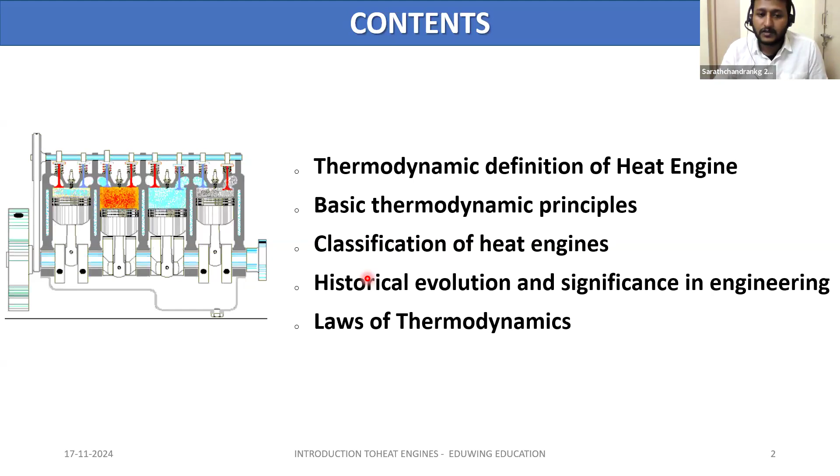the milestones of the evolution of these engines, and we have a few laws of thermodynamics that also we are not going too much deep into, but a basic idea is required for understanding the working of a heat engine. So let's move into that. So what is a heat engine actually? As the basic principle, thermodynamically, a heat engine is any device that can convert thermal energy into mechanical energy. Hope we know what is thermal energy and also what is mechanical energy.

Thermal energy, we can say it as heat, and mechanical energy, we can refer to as work, mechanical work. I have highlighted heat and work in red, because we need to understand them properly before moving to the contents. We will be having a concept of heat as well as work, and a little more additionally we have to know. So as per this definition, any device that can convert thermal energy to mechanical energy is considered to be a heat engine.

Then the crackers, right, which move up and crack above in the sky. Rockets, cracker rockets. That also, by this definition, is a heat engine, right? Rocket engines, maybe guns. That all comes under heat engine by this definition. So whatever we know is far different from these bodies that are converting thermal energy, right? So there is a difference. For understanding those, we have to go through these basics.

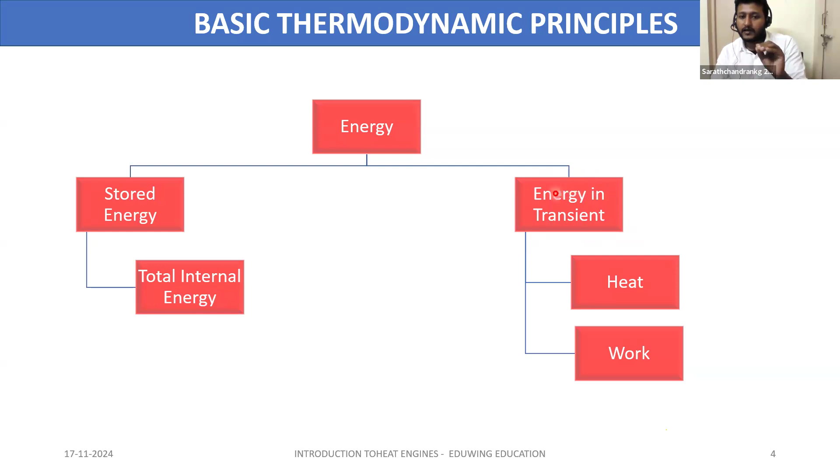But for us, who are going to study heat engines, work actually means mechanical energy only. So for our convenience, we will be terming energy in transient as heat and mechanical work. Okay, so that's what I was referring to here: heat and mechanical energy, thermal energy and mechanical energy, heat and work. But there are other kinds of work also, as I told you, like electrical energy.

For example, when you connect a bulb or a resistor into an electrical circuit, it raises the temperature, right? That is because of the electrical work done on that system, not because of the temperature difference. There was initially no temperature difference, right? When the current passes through that resistor or light, it heats up just because of the electrical work being done there. So that is not important in the case of a heat engine. So we will be considering heat and mechanical work only. Okay.

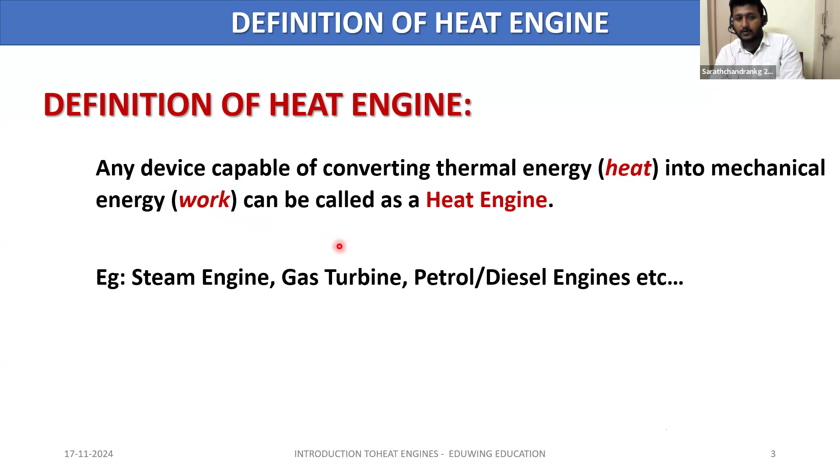So the types of heat engines. As I told you, by definition, anything that converts heat into mechanical work can be defined as a heat engine, right? But conventional engines like a petrol engine, a diesel engine, a gas turbine or a steam turbine are different from these. It's different from a gun. It's also different from a rocket cracker, right? It's very different. How is it different?

Because once this cracker or a gun is shot, a process happens, that is a burning happens. That means the gunpowder burns, heat is created, I mean a heat transfer is created, and it is converted to mechanical energy, and the process stops there. It won't generate again. I mean the heat energy is not transferred again in that system, or converted to mechanical energy in the system, right? It's a one time process. Once the gun is fired, that is done.

But in case of the heat engines, what we are going to discuss, the operation will be cyclic. We know we have petrol engines, diesel engines, and how they work. We pour the fuel into that, it will be burning continuously and giving out the work output continuously, right? Until we switch it off, it will work continuously. Or we can say it is operating in a cycle, or the system restores. Even though I haven't taught you this example, you can see this is a cyclic process.

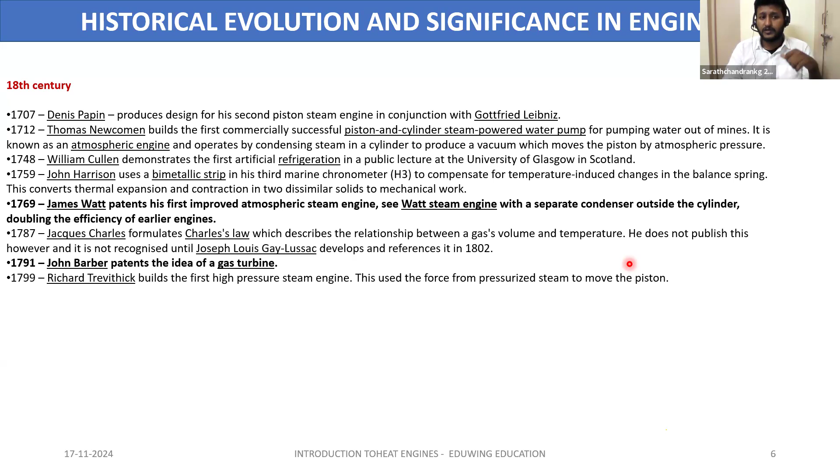In 1791, John Barber came up with the idea of the gas turbine. Gas turbines are basic working things, right? Abrams tanks, American tanks, are powered by gas turbine engines. There are gas turbines that power aircraft also. So that is another important invention. In 1816, Robert Stirling invented the Stirling engine.

Then after that, Lenoir, I don't know exactly the name, came up with the first commercially successful internal combustion engine. Before that, almost everything was an external combustion engine, which we have already discussed. So what is the difference? We know the difference, but why are internal combustion engines important? Because internal combustion engines reduce the size manifold.

External combustion engines require places where the combustion or generation of heat happens somewhere, and it has to be transferred somewhere else by some other means. Another medium may be used, like water to create steam, so a boiler is required. Then space for the engine is required, too many components come into it, and it becomes immensely large. Coming to the internal combustion engine, it would be very small. So that is the difference. So it's very important to have an internal combustion engine. This is another milestone.

And in 1861, Nicolaus Otto came up with the first internal combustion two-stroke engine. You have heard about two-stroke engines. You may have a good idea about them, because many bikes roaring on Indian roads, as well as many other roads, with high power are made with two-stroke engines.

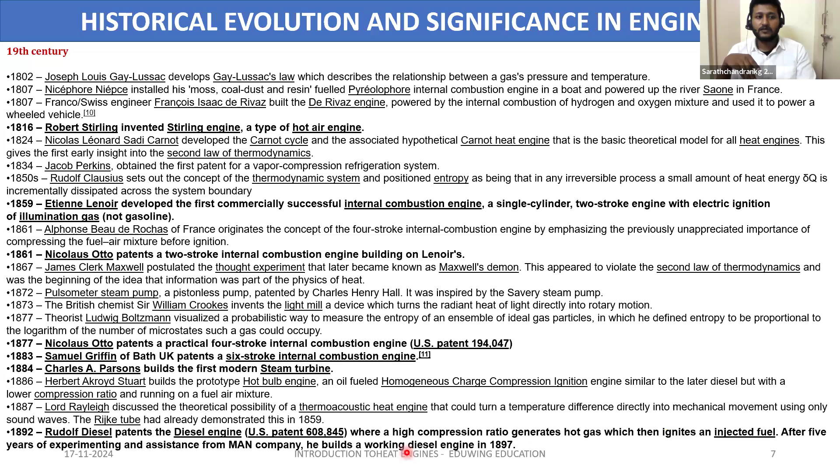And in the 20th century also, there are many further developments: liquid fuel rocket engines were developed. Tesla came up with the Tesla turbine. The gas turbine was before this one. The gas turbine was just on papers, just working models were there. This was the first running model, commercially available model.

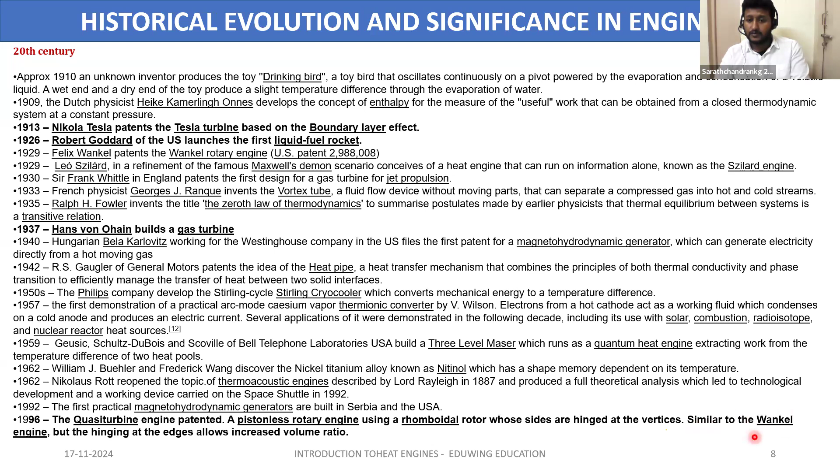So again, the Wankel engine. The Wankel engine is a rotary engine, similar to our two-stroke, four-stroke petrol engine, but it is a rotary engine. It's somewhat like a rotary plus reciprocating engine. That's used in racing cars and all. It's capable of running at very high speeds, but has a defect that it can't run slow like conventional reciprocating engines. We'll discuss that also later. So this is not common in commercial cars and all.

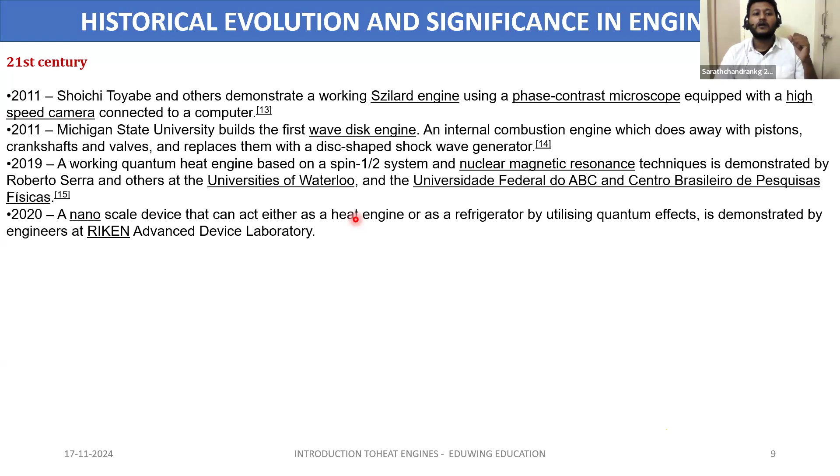So in these times, whatever is happening is very micro scale. A lot of research is going on actually, but not great ones other than the listed ones; micro or nano scale engines are being developed nowadays. We know nano robotics is all coming. So many developments are actually happening. We are not going to discuss these things much. I just wanted you to know a lot of things are happening. Still, you know, many advancements are being listed by the manufacturers of many vehicles in the engines. They are claiming a lot of advances.

So we will move on to the basic laws of thermodynamics. The zeroth law is the first one that we are going to discuss. It has importance, but it's of very little importance when we study heat engines. But as I want to mention the first law and second law, I also want to mention the zeroth law. That's why I put it in the slides.

It states that if you take three bodies, that is body A, body B, and body C, if body A is in thermal equilibrium with body B, and body A is also in thermal equilibrium with body C, then bodies B and C are also in thermal equilibrium. It's not a big deal to understand, right?

For example, if you measure your temperature, if you don't have fever, it will be showing 37, I guess, 37 degrees Celsius. And if you measure the temperature of your friend nearby, the thermometer is also showing the same temperature, and your third friend is also showing the same temperature. Then all three are in thermal equilibrium, right? You all have the same temperature. That is what is being mentioned here.

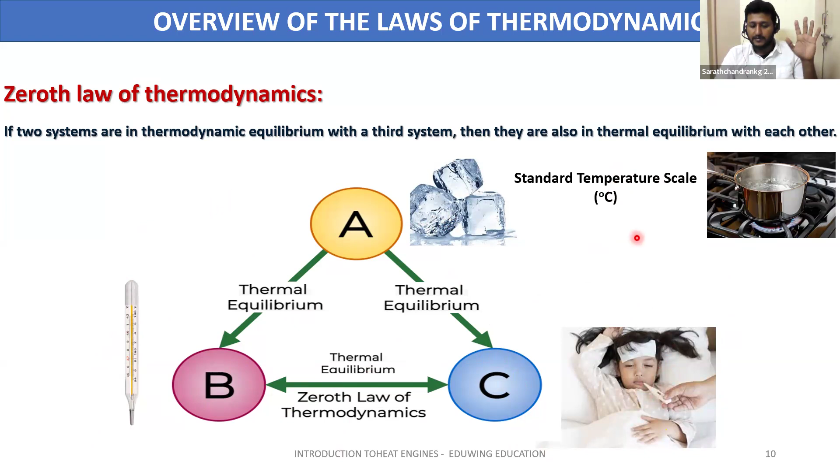So next we will go to the first law of thermodynamics. Hold on a second. Okay. So the first law of thermodynamics is very important when we are considering the working of a heat engine. So what is the first law of thermodynamics?

Similar to Newton's second law of motion. What does it state? It states the conservation of energy, right? Law of conservation of energy. That means energy can neither be created nor destroyed, but it can be converted from one form to another. We cannot create or destroy any form of energy, but it can be converted to another form of energy. Okay.

You can't hear? Hello? Yes, we can hear. Yes. Shanish, I think you have to check your microphone.

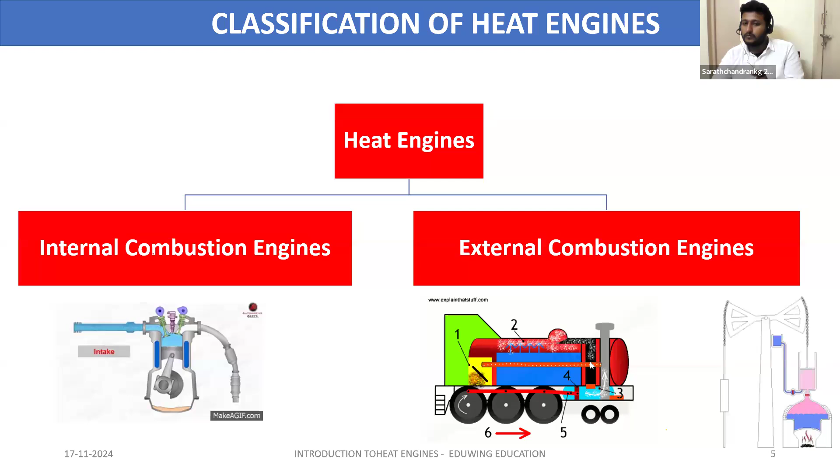Actually, we all know mass will be carrying energy. So the flow of energy will be associated with the mass flow also. For example, the working fluid is steam in a steam turbine, right? I also explained about the steam locomotive here. Here, what is carrying the energy? Heat energy is being carried by the steam here, right? You can see the steam is carrying the heat energy that is being supplied. So this is a mass that is carrying the energy. So it is important. That's an open system actually.

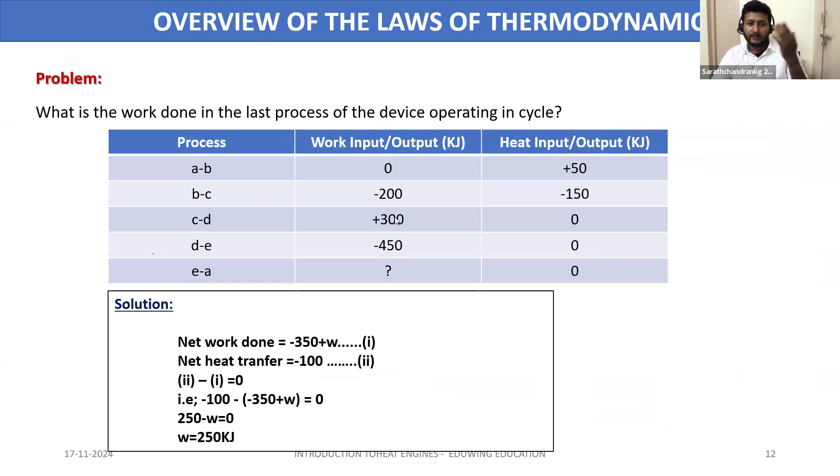And one more question was there. I couldn't see about the problem. Okay, simple as that. What is the first law of thermodynamics? First law of thermodynamics says that in a closed system operating in a cycle, the net heat transfer is equal to the net work transfer.

So this is a cyclic process. This is a problem actually where a number of processes were given. In each process, the work output or input is given. Also, heat output or heat input is given. So we are going to check whether it's a cyclic process. A to B is a process, B to C, C to D, D to E, E to A. That means the system returned to the initial state A, right? It started from A, ended in A. So it is a cyclic process.

So in the process AB, in this system, we can apply the first law of thermodynamics in a closed system. It's a closed cycle, right? So it's a closed system operating in a cycle, a cyclic process. So we can apply the first law of thermodynamics here. So we will find the net work transfer. If you take the sum of these works, it will be the net work transfer, right? So minus and plus are given here. Minus means it's the work input.

Work output from an engine or any device, whatever we expect, whatever is useful to us, is the work output. Actually, mechanical work output is a useful thing for us. So if a device is giving work output, we will consider it as positive. That means this one, this 300, plus 300, is a work output. Both the other things are negative.

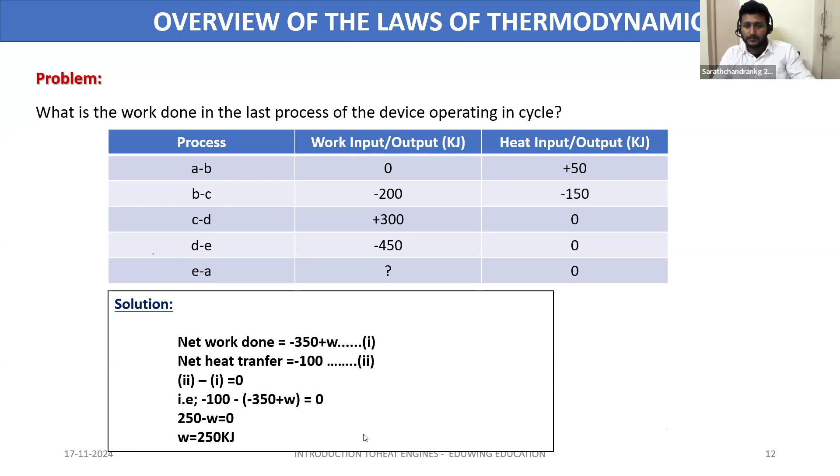Where are the messages? Hope you understood. I don't have the name.